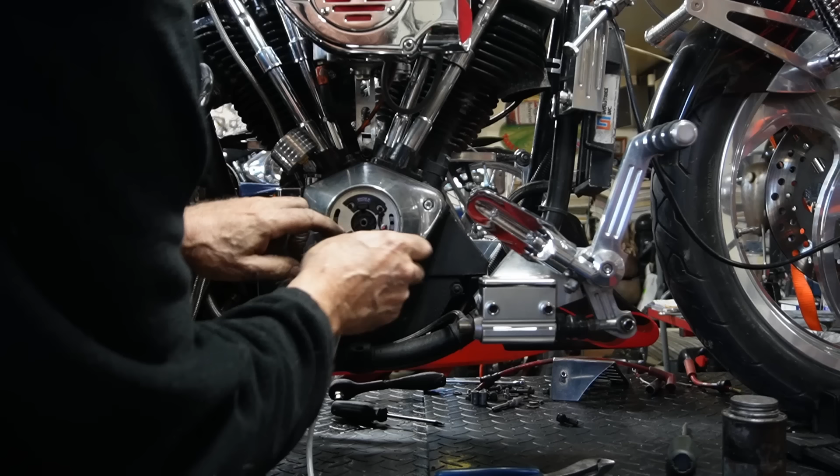Today we're going to do some work on Trigger and try and tidy up some wiring, get some things straightened out. We've put the Dyna ignition system in it, but the other one blew up, so we put that in. And we've got to check on the trailer wiring and the trailer lights, just kind of give it a going over so it'll be ready for Frank in the spring.

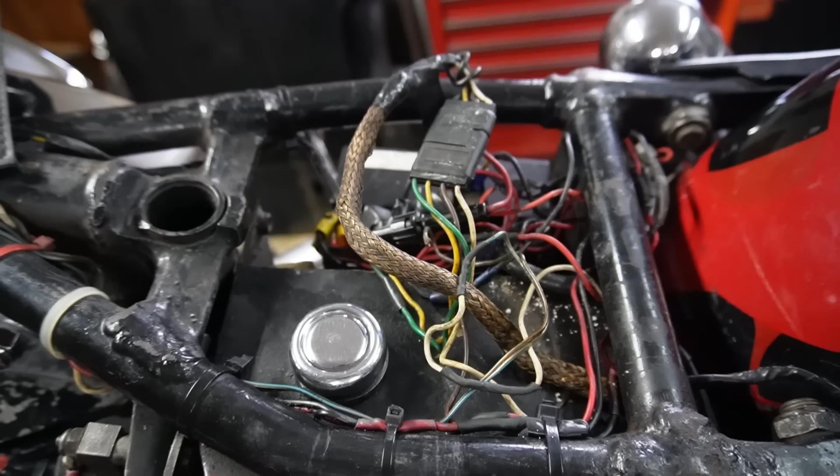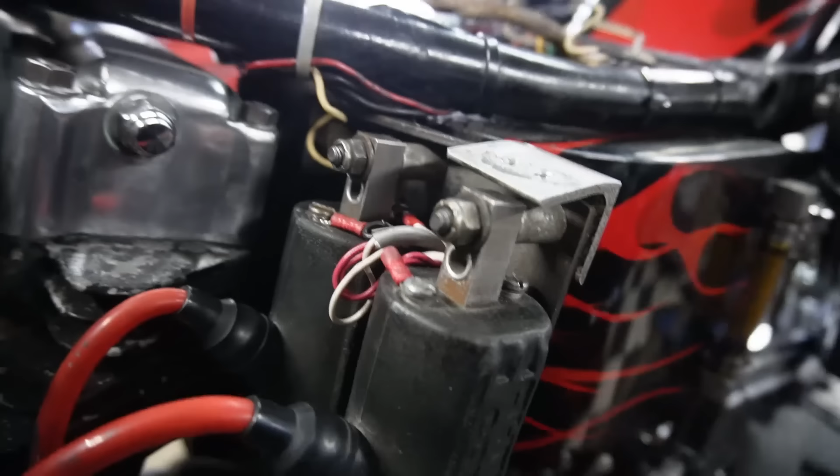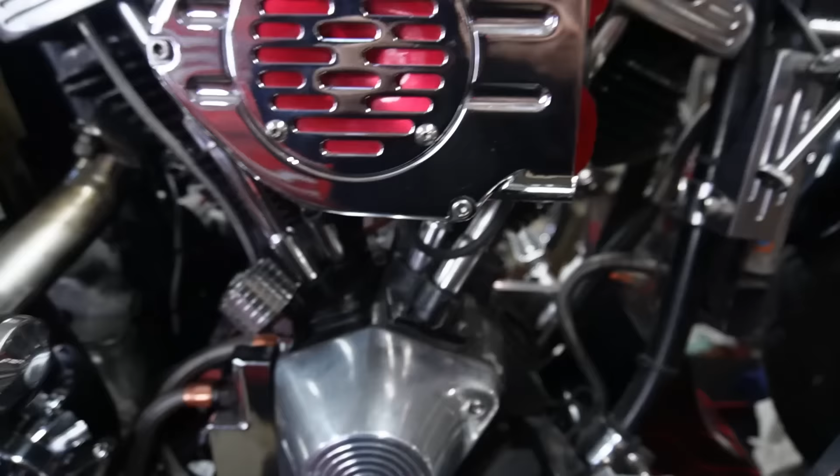So the plan is to try and straighten up this mess here. We're going to rewire the switch up here and put new contacts and such in, since they've been in there a long time. We've got the coil all done and rewired with the new ignition system. You can't see it down in there, but there was kind of a glow light system, and some of this old wiring here is part of that. We'll see what we can do to tidy things up.

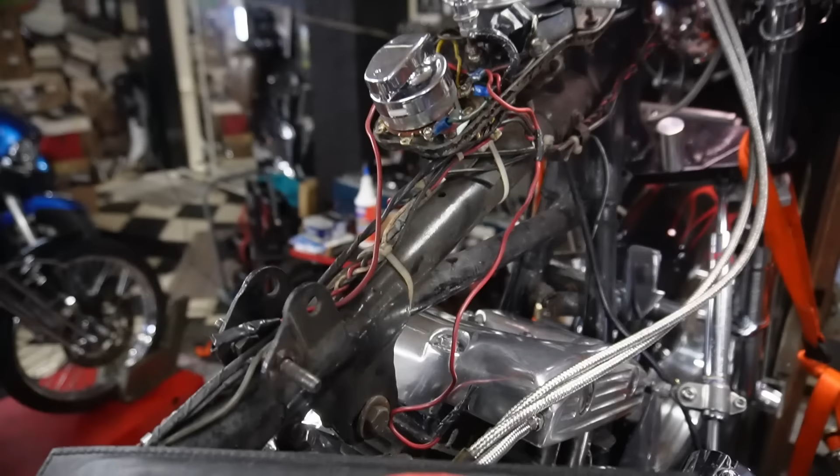We also got to make sure we got our trailer wiring in. Trigger's got the trailer, and this plug-in up here will retain this, because it's for our trailer lights, so we'll keep it separate. It's not a whole lot to do, but Trigger just needs some work. It's been a while since she's had a going over electrically, so we're going to see what we can do.

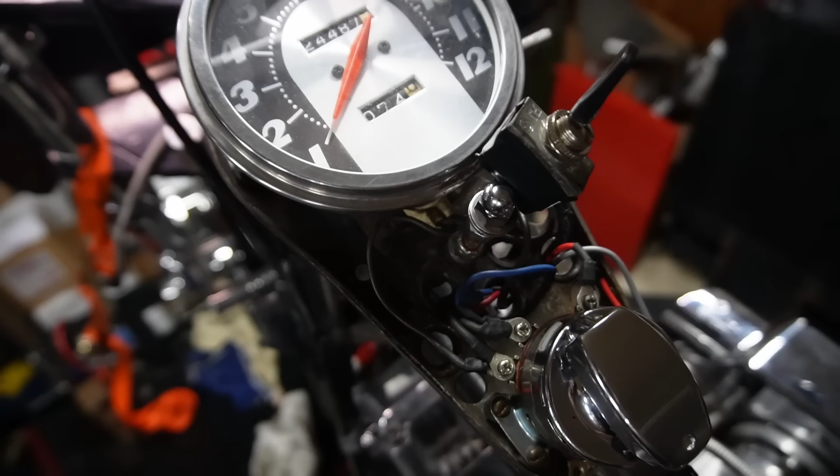So day one, we're getting her a bit cleaned up, and we're going to wrap it as it comes down through here. I think it's where we're going to put our junction box right here, and we can work off of that from the tail light and stuff. I'm going to wrap this afterwards, but we just got this in place right now. For day one, we're getting there.

So wiring can always be a tedious sort of thing. It takes time. You have to put your head in the right headspace and think about where things come and where they go. But getting Trigger cleaned up a little bit is a good thing for the future. So we'll just keep working away at it.

Well, it's pushing on 5 o'clock now. I didn't get as much done today as I thought I would. We got hammered in snow last night. My buddy Law was just here and plowed me out, but I had to do a bunch of shoveling and clean my shed off. I hate winter, I hate having to deal with it. So I'm behind again today, but hopefully we'll get a nice clean day out tomorrow and I can get a lot done. All right, I'll see you then.

So now we're gonna get the exhaust off here in order for me to move the oil filter bracket out, so that I can get in there at the horn and my brake light switch and make sure that everything's working as it should be.

I can't really tell up top, there's a lot of wires and I have an idea where they go. But if I can't put a test light on them, or a tester, and make sure that I've got power happening there, I could wire it all up and get it all ready and then find out it's not working.

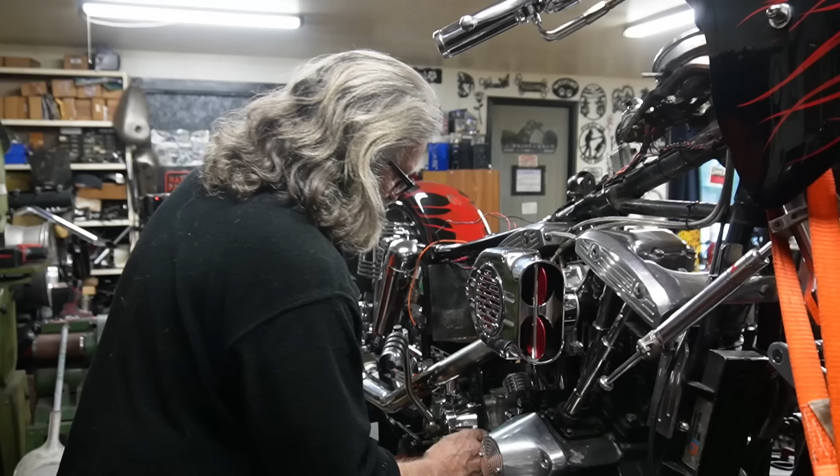As much as it can sometimes be a pain, please loosen them. I made this extra bracket to help keep the exhaust up in there, and it's worked really well.

So like you can see, we got a problem here with this helicoil. Appears to be pulling right out of the head. And Frank didn't mention it, but Frank likes it noisy.

A little locking clip for it, and this is supposed to be able to stop it from moving there, so it doesn't look like it's doing much of a job. We're gonna have to figure out what to do with that. Doesn't look very good in there.

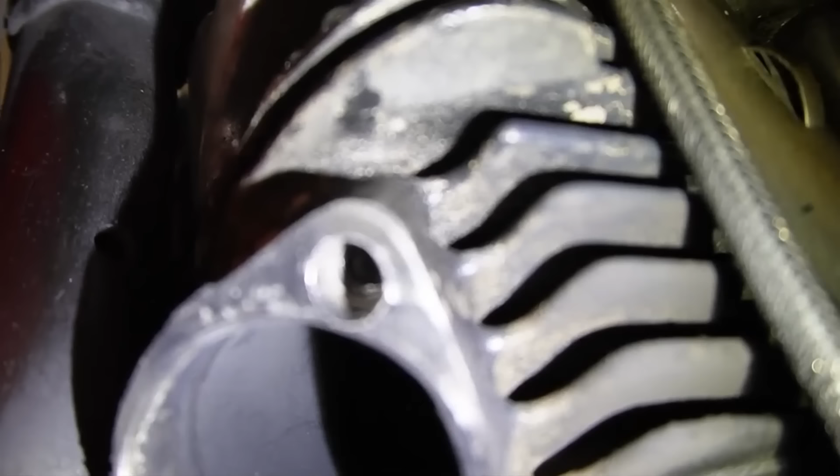I can screw it out of the helicoil, but the big question will be if we've got enough left inside the head here to pull it, if the helicoil just started to spin out or whether it came out all the way. So we'll have to take a minute and have a look there. Trying to get a shot up in that hole, but it's pretty hard to see. The helicoil is way up inside.

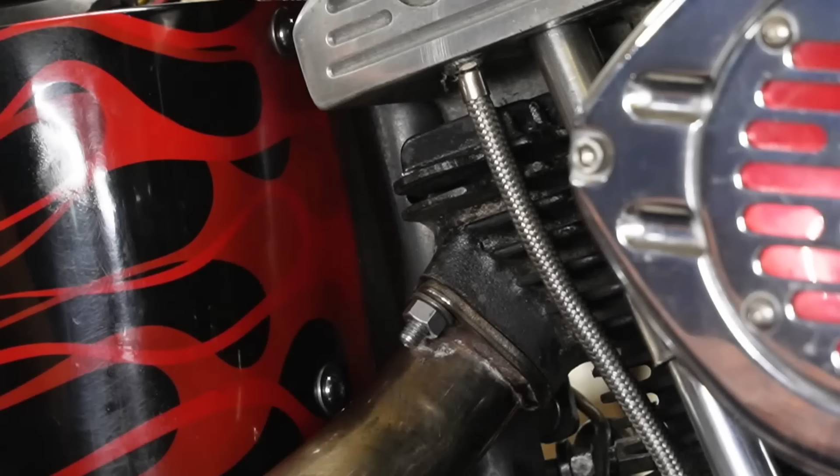Somebody's put a 5/16 helicoil in there at one time, and I can't really get it out on the bike there. So what we're going to try to do is make a stud to go up inside.

So we managed to fix the stud up in his head. Ironically, back farther in the head was a 3/8 helicoil for some reason, and on the outside a 5/16, which was stripped out because the bracket wasn't supported properly.

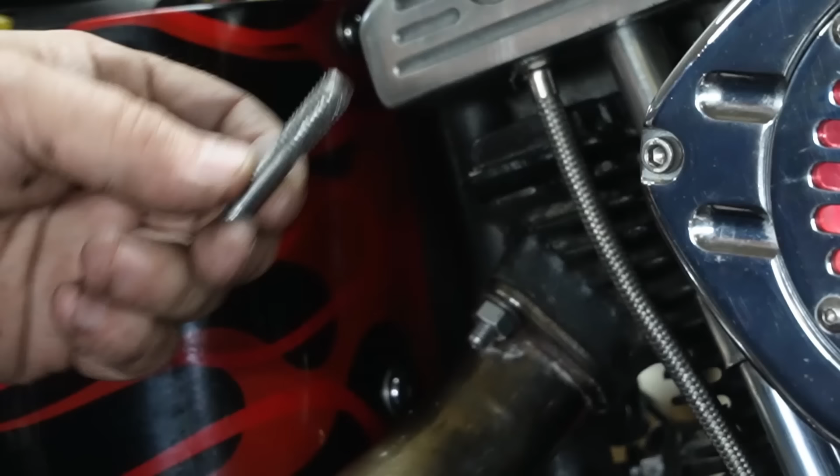So we machined a piece to go up in there out of hardened 3/8 bolt, and then tapered it down. After a few fails we finally got what we wanted, and we were able to put it up in the head, Loctite it in there, torque it tight so it bottomed out. Now we're going to put this on it. We don't have the gasket on here yet, but we'll get to that.

So what we're thinking about doing here is making an extra support underneath the pipe. Frank's bike rattles and shakes when he comes onto it, so we want to make something strong. The rear mount is holding it in place, but we're going to reinforce that. So we've taken a piece of cardboard and started making a template here to go off of.

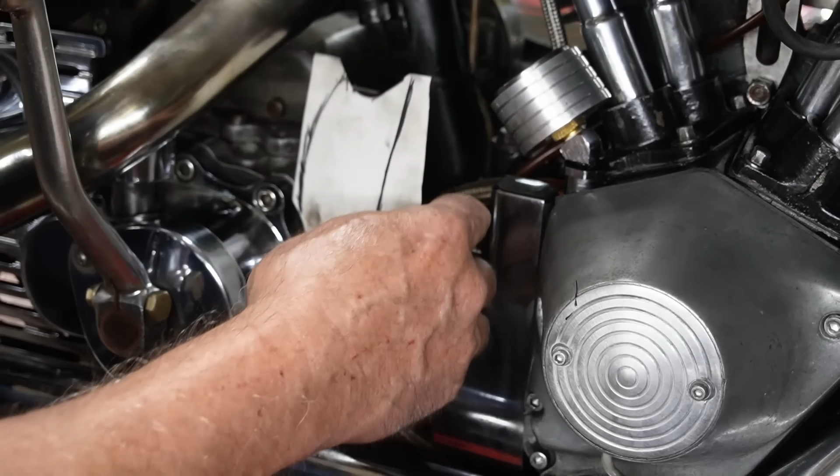We'll go off the two bolts, this one here and this one here — these two places will be where it gets positioned. We're going to cut it out and put a small cutout up in there, and I'm going to trim this back. Then we're going to put a tab on the exhaust pipe itself to weld it on, so it's got something to bolt to with a slot in it, so that if the transmission has to be adjusted backwards or forwards, you can still use the same bolt.

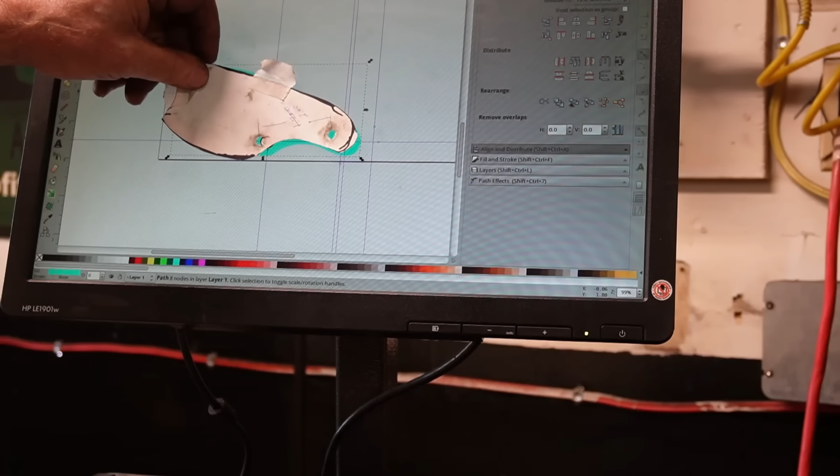So what we're going to do is try to fabricate this piece now. We've taken our piece, cut it out, and traced it on here. A little trick you can use is tape it right on there, and that lines up pretty well. Then you just check your distances from these two holes, and away you go.

So we're close there now. Looks pretty close to what we've got. We're hoping we can give it a cutout and see how it comes along. Now we've got it ready to cut here on our program, and we just have to zero some things up. We've got it where we want it.

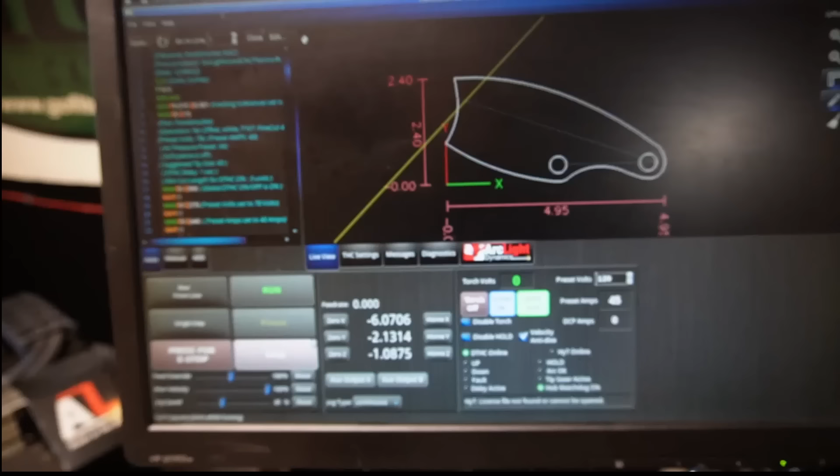That'll be our little test piece. So we'll take it, try it, fit it, and see if it fits on the bike where we want. Then we can make our adjustments. That's about where we want it now. Everything seems to be fitting into place, and that'll add an extra brace here.

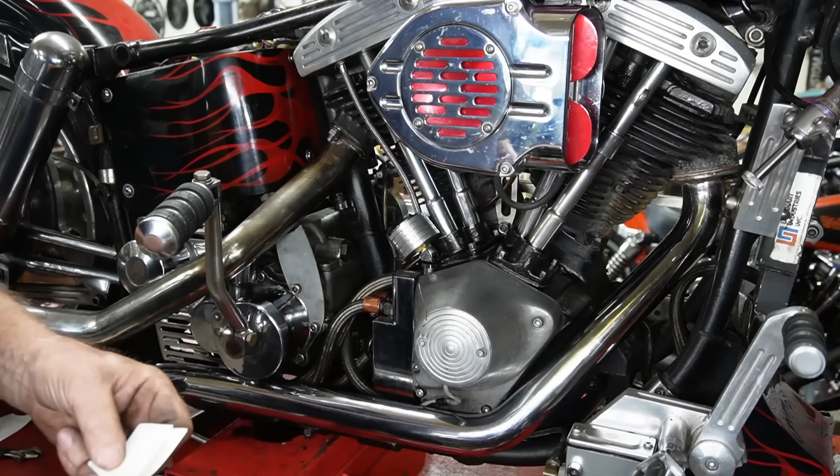So what we're going to do now is try to make us a little bracket to go around the exhaust pipe. We're going to need it at a 1 3/4 hole. We'll just eyeball it here.

There we go, that seems to be getting it in place where we want it. This tells us where our original bracket is, so we're just going to trim this.

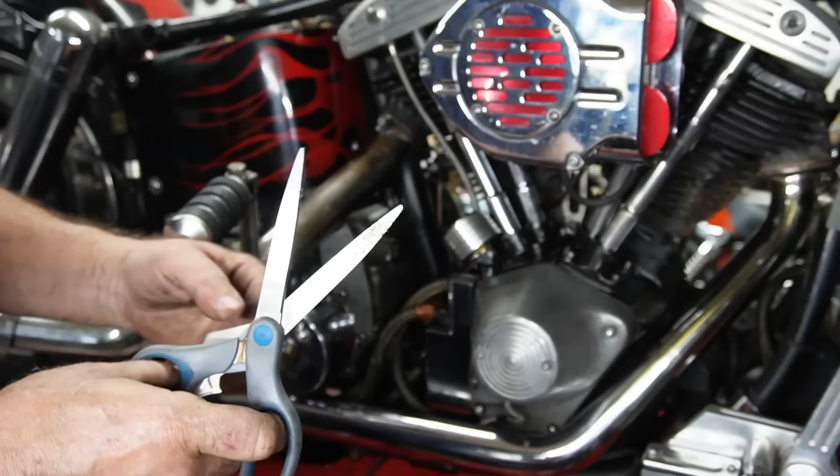Now we just need to make this a little bit longer here, but not a whole lot, so that this bracket will bolt up against that and keep these in place.

So that's what we're going to try to do next. We're just going to cut this one out by hand — it's just as easy to do that. So we're drawing it out here on a piece of 14 gauge, to be good and thick.

We know the line comes down there like that, so we're just going to add a little bit of a loop here to start with, and that should give us enough to work our bracket.

So we've got the little piece in here now, and it looks like it's going to mount up just right. We've made this little piece, and we're going to attach it up in behind on the exhaust pipe, and that will be where we want it to go, right there. So we've marked it in behind along here, and we've marked it here.

I'm going to take the pipe off and weld this tab on, just stick it on, and we'll see where we are from there, whether we're close or not, but I'm pretty sure we got it where we want it.

So now you can see we're test fitting the bracket in place here, and it looks like it's going to be just right for what we want, and that exhaust is going to be as solid as can be. We've got a through hole here, put our bolt through, clamp it once we're all welded on, and that should fit just right, I'm hoping.

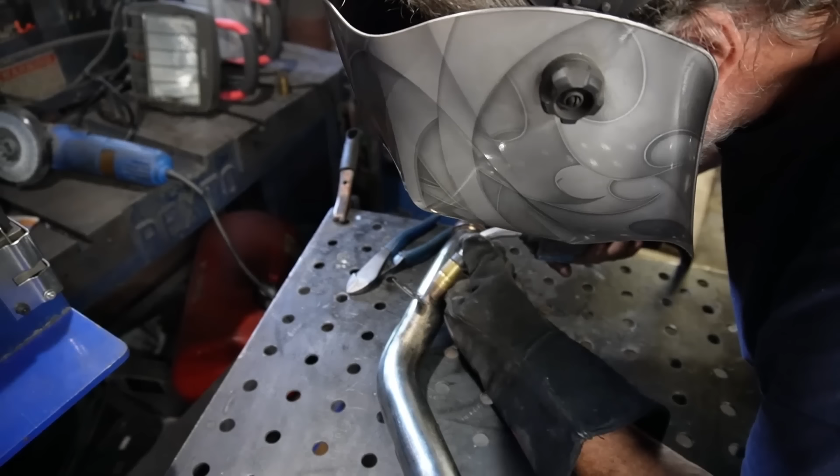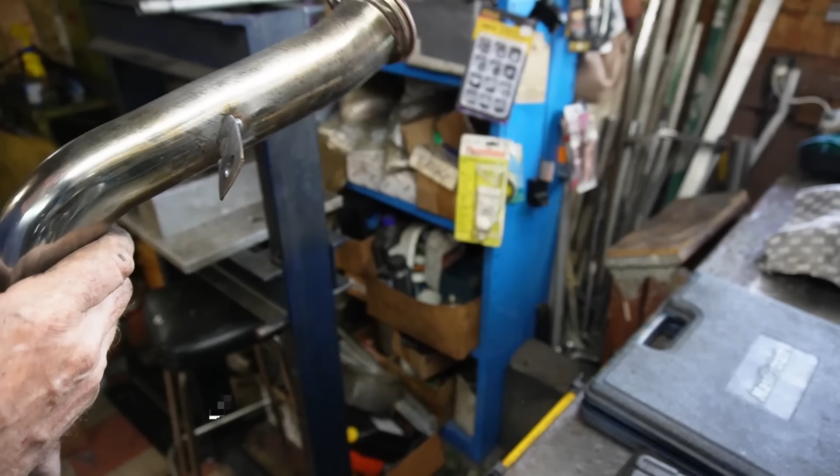So now we've got the bracket in place underneath, and we welded it up so that it should be okay to go. We're gonna put it on the bike and make sure everything fits right, and that should be about it, I hope.

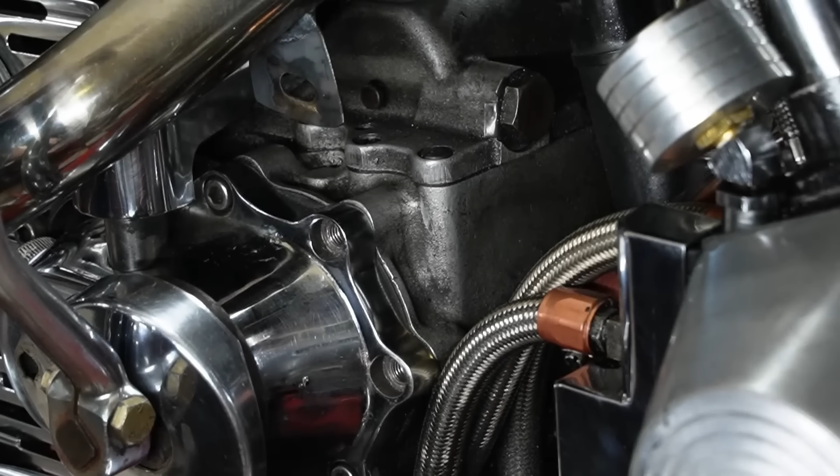So now that we've got the tab in place and we've taken things off, we want to draw attention to a couple things. We've made small bushings here to go in, and because these are countersunk, we want to put these bushings inside so that the plate will stand off of the bushings and not be crushed into the plate and try to twist and go on.

The next thing is that these holes are only about 3/4 of an inch from the edge of the seam here. So you've got to make sure that you're in there far enough, and a lot of times these holes get walled out and they're wiggly and everything else.

So what we've opted to do is put the plate on. We're going to take a piece of threaded rod and stick it in there just to give us some idea of where this is going to sit once it's all in here. And it's always nice to know too, to make sure that your bracket is fitting nicely there when it's tightened in.

We don't want it to be pressing against this, you know, and as you can see where this is loose, this bracket is just going in and sitting right against the face there. So it's not a problem at all.

That's something we thought somebody should watch out for - if the tab was bent or if the tab was not in line, you'd always be putting pressure on it. So by putting these standoffs in and holding our plate out to where we want it, that gives us a better chance of everything just being held in place, but held strongly with no stress areas.

So we're going to put this in here and screw it in. I've snugged the top one up. We want this in far enough, but I want to make sure I'm bottomed out into the bottom of the threads, because we don't want to go in there and think, oh yeah, that's it, then go to tighten it up and you're on a bunch of messy threads. First thing you know, it'll pull it out.

So we're going to double nut this down here just to make sure. That's going to give us the ability to move it all the way in and make sure that we're bottomed out in the threads. I'm just going to lock these two together. If you don't, you could be fooled, think that's it, snug it up, and then find you've just pulled the threads right out.

So this is definitely going to give me an idea of how deep we can go with this piece of rod. There we go. So I'm going to back this off now, and I'm fairly confident that I'm in there.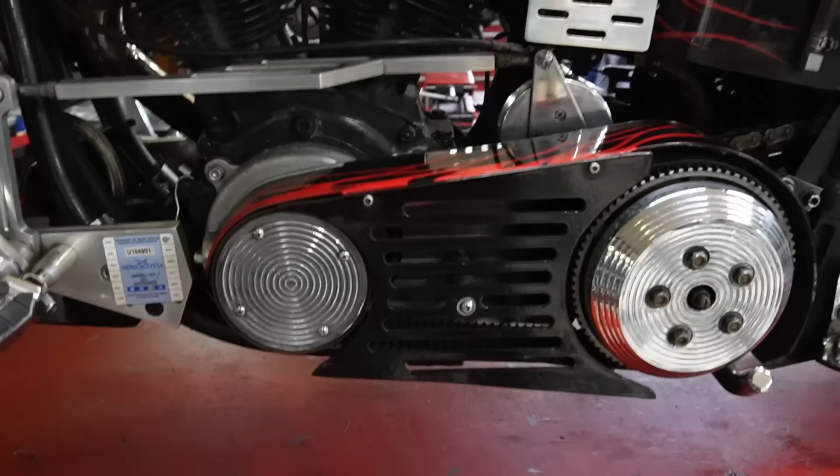As I work on Frank and look it over, I see so many things that we made over the years. Fender struts, battle bag supports. We built the oil tank, we built the cover for the ignition system. We built all the covers for the belt drive system and the spinners on it.

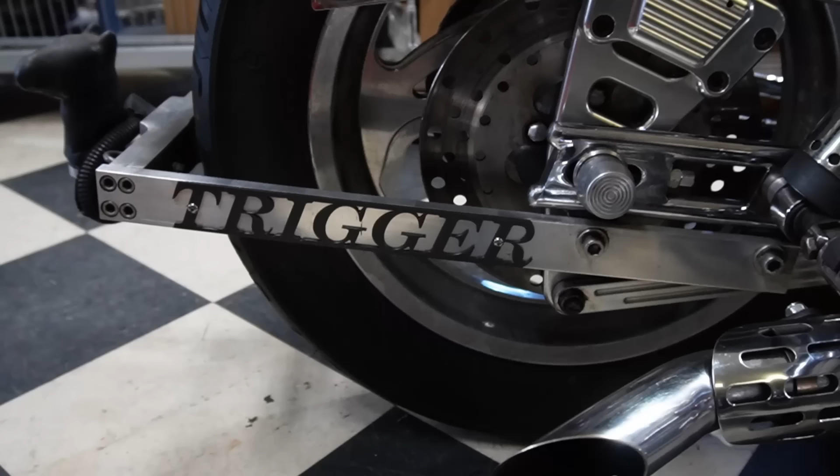The early style forward controls are something that we made in the earlier years. But as we got along, we progressed. There was a different sort of shift rod made for Trigger and a lot of other handmade pieces. We made these pieces to go on the back swing arm trailer hitch for him there.

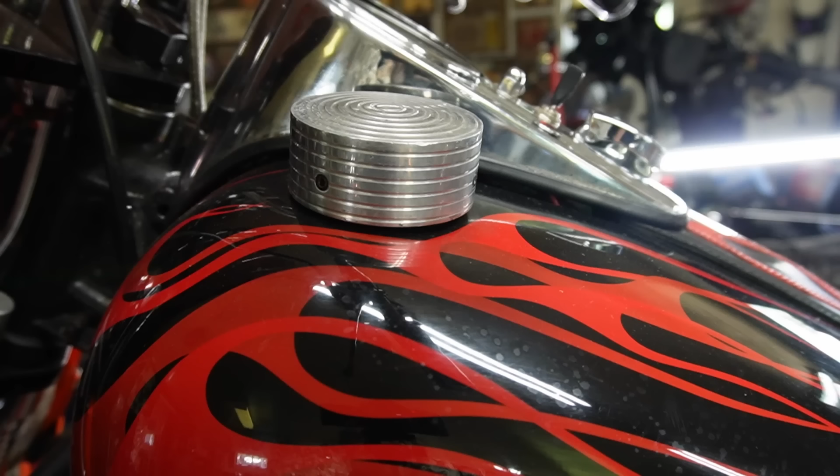Trigger's also got one of our early PMC fork stabilizer bars here to help take the twist out of the front end. Spun out the aluminum gas cap covers for him. We also built an all steel air dam on the front, to direct some cool air to the engine.

We also hand built the oil tank, put a couple switches here for him, and this is a viewer for your oil lines, for your oil tank. Tells you whether you got oil in it or not, so it's nice to have.

Frank was always one to say, no matter what you're going to do, if you can make a part, make it, and we'll go from there. So that's what we've done. The Ness swing arm was one of the nicest items on it that I liked that was aftermarket. God love you, Arlen.

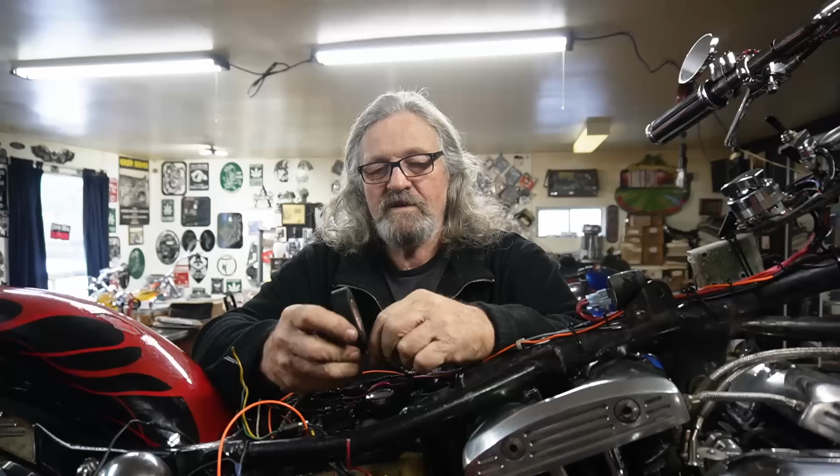So as we're working away at things and trying to clean stuff up, as I look over Trigger, I remember a lot of the times that I made parts for this bike over the years. Frank and I have been friends for way over 30 years now, and I sort of became attached to Trigger just as much as he has over the years. We spent so much time together doing stuff and building things, and they were great years.

And as I look over Trigger and start to look at different things, I look at things like the belt drive here, and it makes me think I got a little story for you, because Hip and all those guys seem to have a story, and I never seem to have one. Pacific Mike's telling stories, but looking over Trigger and looking at the belt drive makes me think of something.

Now, a week or so ago, I was looking on the internet and I seen a picture of a guy with sneakers on who had caught his toe inside the open belt drive, and it sucked his foot right up in the belt and showed his toe all bloody. And I thought, yeah, one thing we learned early in the years, if you're reaching down to pull that kickstand out because you got a 3-inch belt drive on it, be careful, be careful.

And when I seen that, it made me think back. I think back to 1996 when there were all Harley drag races up in a place called Maitland, put on by the Angels and stuff, and it was quite an event. It was a big event for the time.

You know, we all took stuff up there. We took bikes up into the show, and I drag raced my knuckle all the time there for 3 years while the event went on. I remember back in the beginning, guys used to look at it and say, because it was all chopped out, that's nothing but a lawn ornament, you can't do nothing but that. So I took it out and dared anybody to race me, and I bracket raced, and it was dead on all the time. I knew exactly what it would run.

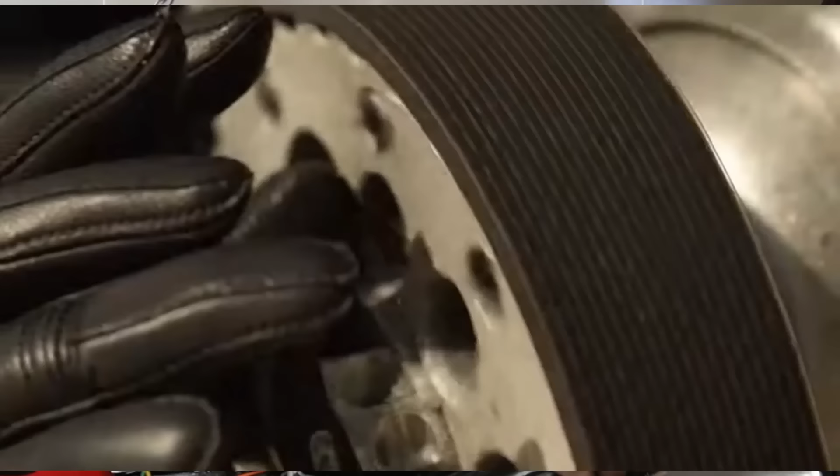When he did, he reached down to get his hand in and get the kickstand out from underneath. Well, once he did that, his hand rolled up around the back of the basket and jammed him there. So there he was, bent over, couldn't get the kickstand out because his hand was jammed in the basket, and he couldn't get his hand out of the basket because he couldn't move the bike by himself. He was pinned there. It was actually quite a while before we got there, so he was by himself for a while. We actually had to roll the bike backwards, put it in gear, and roll it backwards to get his hand out of there.

Made a pretty big mess of it, and he had trouble for a while after that getting things healed up. That certainly made me think about sticking your hand in there. But the kicker was that all the time we thought, no problem, he'll be along with the truck, his cousin will be along, we'll throw it in the back and away we'll go home. Well, little did we know, his cousin, a couple miles up the road in a hurry trying to catch up after seeing Frank go, put his truck off the road and rolled it over, so his truck was all smashed up too. So there was Frank with a smashed up truck and his hand all smashed up from being in the belt. Certainly not a pleasant topper to the weekend, but something we'd never forget, and quite a time.

So there's my little story to keep up with Hip and them these days. Frank and I are good friends, and we always will be. That's one of the reasons we have this kickstand like this today, so Frank can reach down and easily get it. Good times, good times.

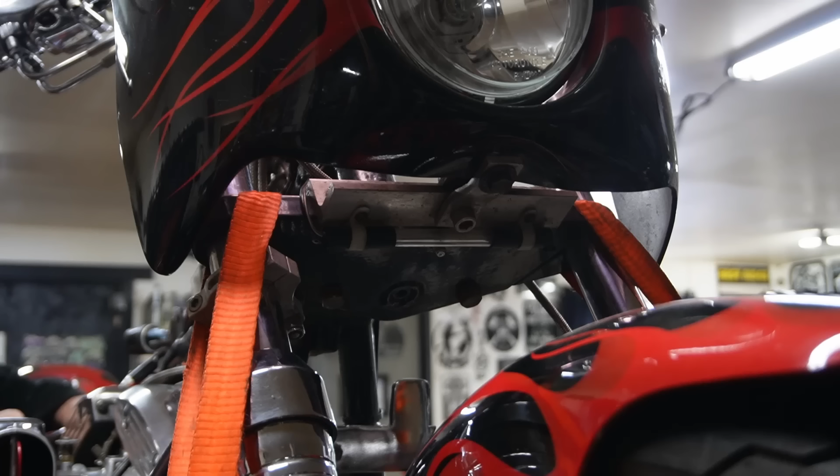Seeing how I'm going along with this, we were just going to tear the lighting system off of it, but I've got to tell you, it looks pretty awesome in the dusk when she's lit up. We thought we had a lot of problems with the units themselves or the switches, but as I go along testing things, I did find some little problems - broken wires and some things like that. Now I think we've got it, so that should be igniting it. See if that makes it a little easier to see.

It's all working, so I don't see any sense in not using it. Frank said he didn't care either way, but we thought we had some other problems. I've got to check some other ones down hiding behind the spoiler - they're quite bright and really light up the bottom of the bike. Let me see if I can get stuff in there and get it together, and check this system to see if it works. This is just to check and make sure our switch is working.

Let me see if I can find the other one and trace it back to get what I've got to find, and see if we can get that working. Yeah, I think I've got the other one isolated. There was a little switch on this side, and I remember at one point we were like, what's that for? Couldn't even remember, and nothing seemed to work. But down inside here, you can barely see the little LED lights just down in there. I'm going to put some power to it and see if the light is working, and our switch as well. I had a little bit of a problem there, but I think we've got it now.

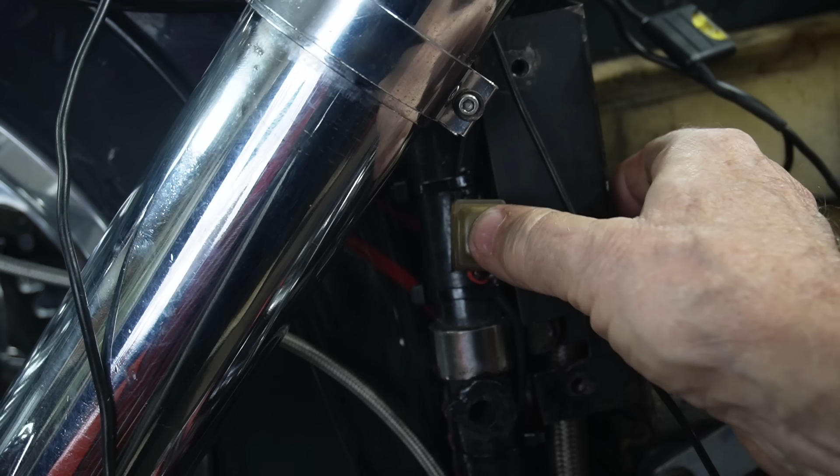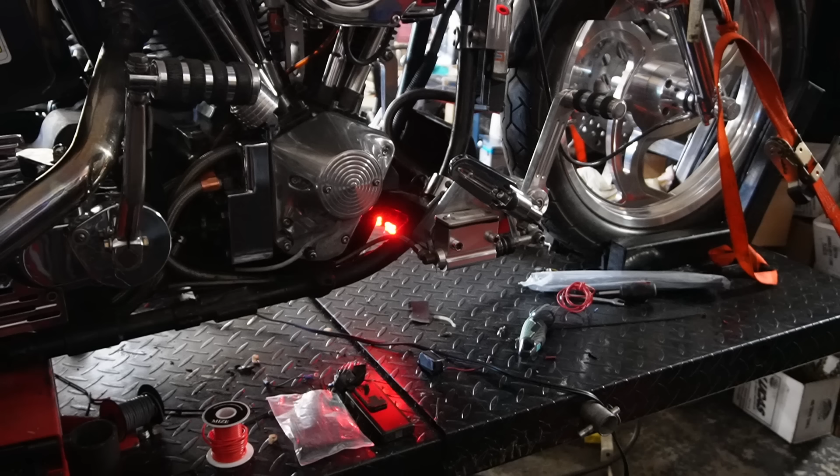Let's just check - my big ground cable wasn't making a good ground. Switch. Turn it on, off, on. There we go. It's pretty cool at night. It's pretty light in here now so you can see it's reflecting off the stand, but we've got a lot of light in here - that gives you an idea. So that's working, and the switch is working, so I'll wire those in, and Frank will know which is which - one's the bottom, one's the top.

I think, but I'm not sure whether there's any on the trailer or not. If so, they'd be hooked in through the plug here anyway, and we'll check that when summer comes. But for now, I'm going to hook those up, wire them into the system, and keep moving on. So with that, we know we've got those things working, so I'm pretty pleased with that. Frank will get a kick out of it when he sees them all working.

So now we're just going to start wiring them all in. I got to double check up here and see what we got going. I got a plan, and we'll just work away at it today.

All right, let me get some other things together, and I'll let you have a peek at it as we're going. We'll try to get a couple other ones checked out here before we hardwire them in.

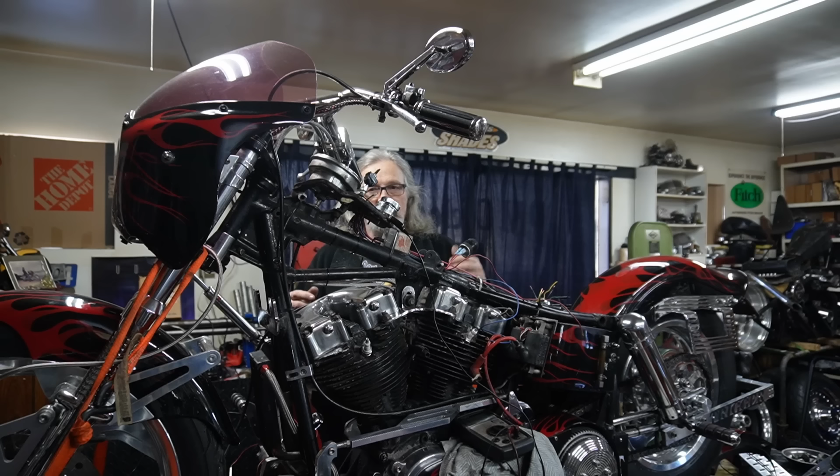Give me my light, headlight, and the horn's not hooked up yet, so the horn's gone bad. But in any case, that's working right.

Now we'll wire that in, hardwire that. We know which wires are going where pretty well. We can start tying things down. We've got the speedo light in there.

Line going back to the tail lights, and power going up here to this switch, and we're all on that line. Try to make some room here. So that gets a lot of that in place.

Like I said, I have the speedo light, the headlight switch up here, the horn button, and the blue line going back to the tail light. I always like to run them in blue, so I know where they are. And I'm going to get a different color to run back for my horn button.

So we've got that squared away, and now the last thing I got left to do is figure out my horn up here and make sure that I've got the right line for it, and that all my connections are working. Then all I have to worry about is my horn.

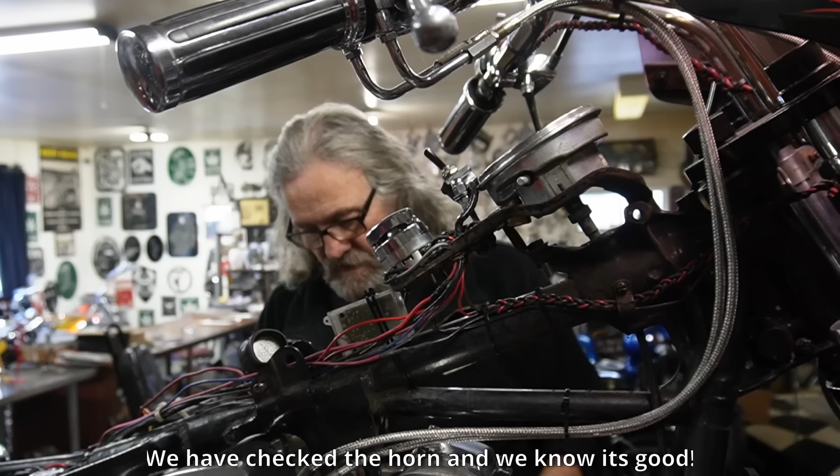So I've got one side of my meter up here on the power side, and the other side on here. And when I press the button, my meter should read.

So I'll turn the switch on to where I know this one here, and you can check by putting it up here and touching it to see to make sure that it's lit up.

We're going to hold it on there this time, and I'm hoping that when I press the button we'll have it there, and we do.

So I'm going to change this pink wire to a different color to differentiate, so I know where my horn is coming back in my wiring harness.

I'll write it all down when it's finished, so Frank will have a copy of it. We know that's good, so I need to replace this wire, and that should take care of it all up front. So we'll proceed to work things back into our block here and tidy up what we can.

We're not going to replace every wire, like back through the taillights and everything. They're all working, everything's working, the brake light and all that. But we do have to wire everything into our block and have it in appropriate places so we know which is which. This is where we're going to put it.

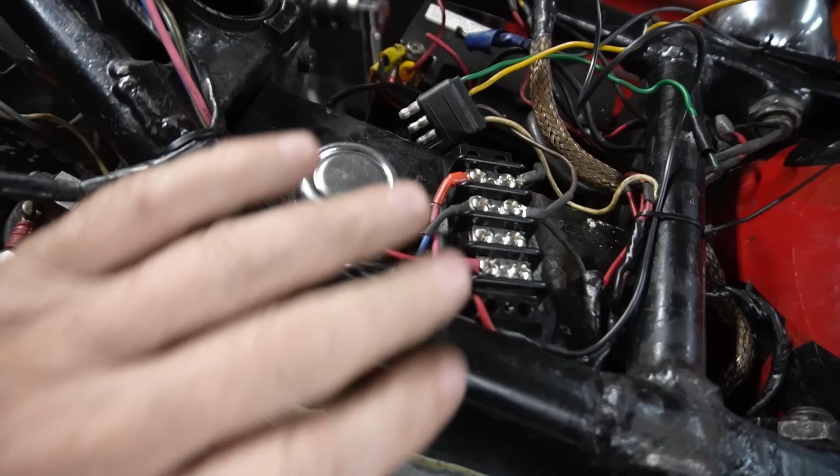I'm going to use some double-sided tape to hold it in place so that you can spring it off if you have to get the oil tank out for any reason.

So we got a couple little things left to do here, and we've got to put a new line on our coil, which means I'm going to have to remove that. But I'll put a fresh gray wire, and the gray wire is always used to go into your coil on these old machines. So we'll try and get those few things squared away and see where that takes us.

Getting our horn is going to be the biggest issue. It's down in behind in there. I'm hoping when I hook up the button to the wire that we're actually going to be able to get the horn to work, but I'm not holding my breath on it, and it's tucked way back inside there. I can see it, but I'd rather not mess with it, but we'll see.

Take your time and tie wrap them in and things. It'll save you a lot of grief later. I'm going to wrap this afterwards, but just got this in place right now. Cleans it up, and we'll work all those to the inside so they don't rub on the tank by chance.

Now, we'll work our way to the back and get these ones tied in. I can go back and check my tail lights out and make sure all that's working right. But we're good to go up here, we're golden.

Now we're just going to put some of this open split sort of sheathing on it.

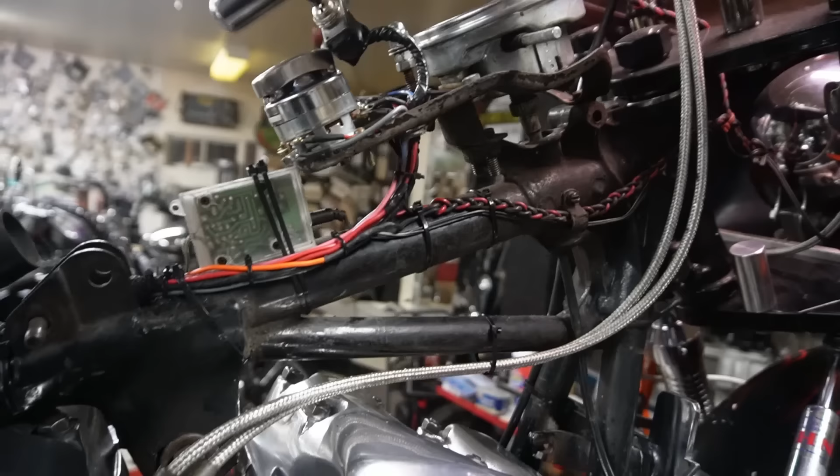So we're getting there now. We've got her all cleaned up, tidied up. It's a hell of a lot nicer than what it was, with a little bit of sheathing and cleaning it all up.

I've got a few more checks to do tomorrow to make sure and see where we're at, but I think we're pretty close, and I'm feeling pretty good about it. I think the brake light switch isn't working, so I'll have to change it out. I bypassed it, and my wiring and everything works alright, so I know that's not the problem. Tomorrow we'll change that switch, do a few more checks, and then we should be good.

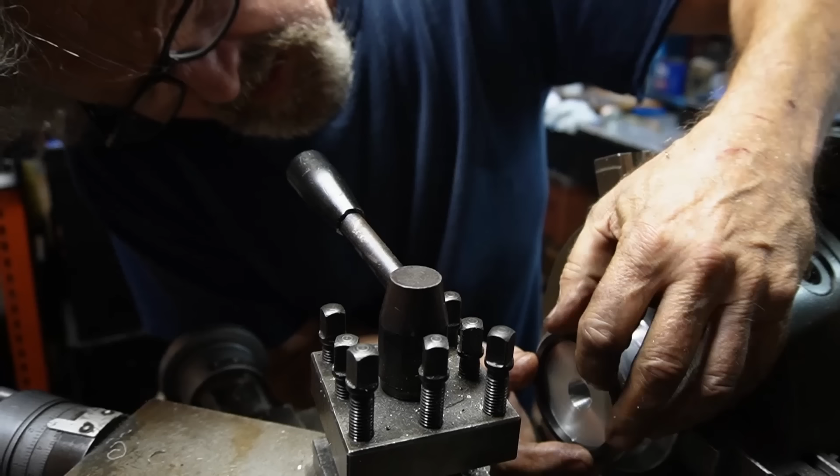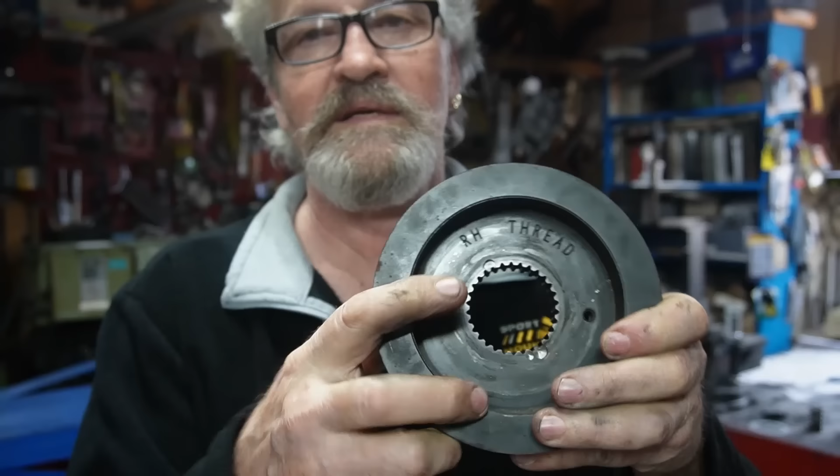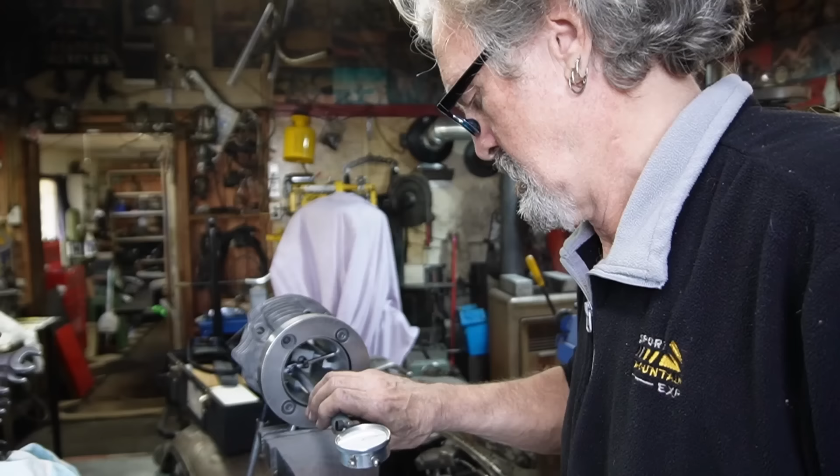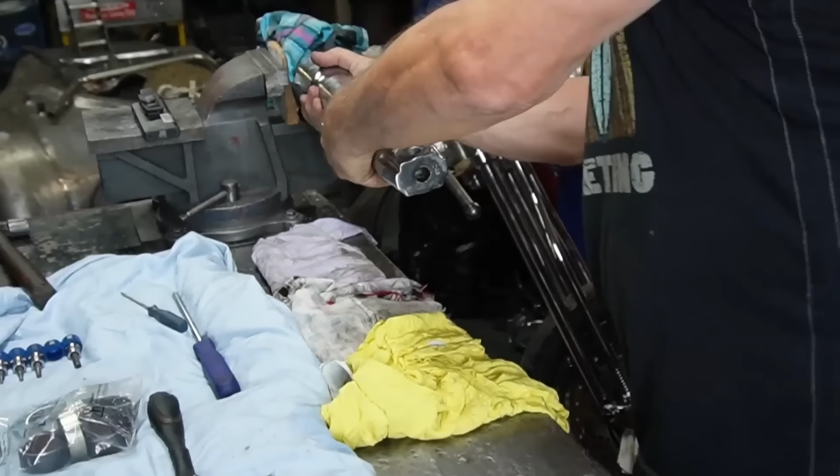So that's what it's all about, friends, spending time and doing things that make each other laugh and have a good time. I'm so grateful to have joined up with Slick and Hippie, and we've worked together since the beginning, and it's been one of the great pleasures of my life.

So thank you, Slick, for that, and thank you, Hip, for working with me. It was great to talk to you this past weekend. Take care of yourself, and we'll talk again soon.